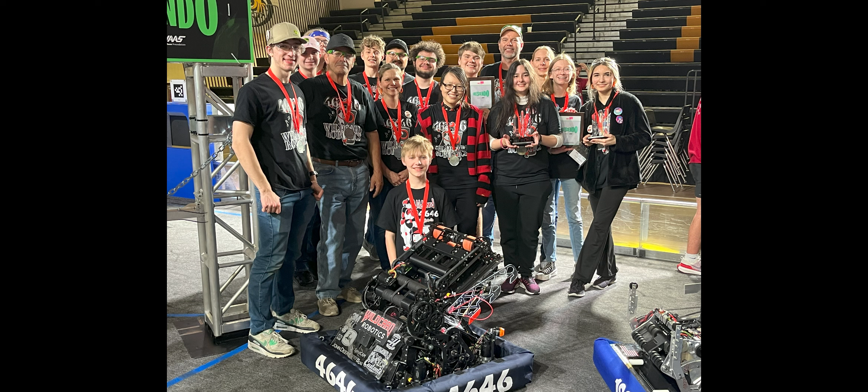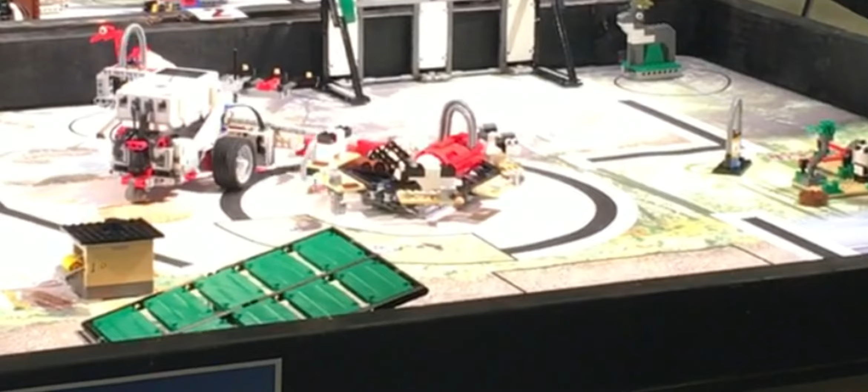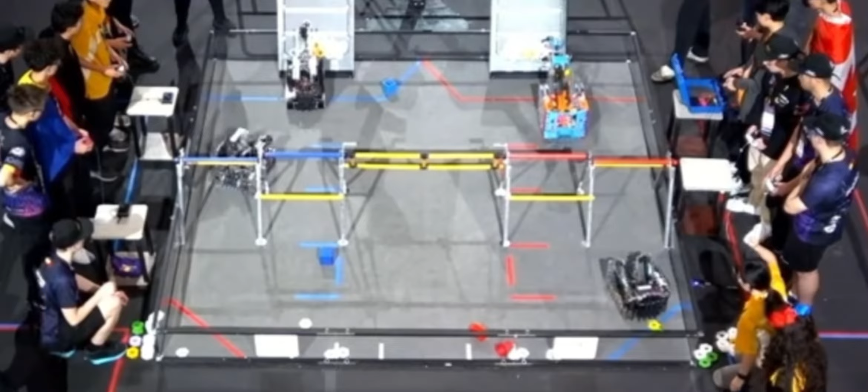We would like to introduce you to Wildcard Robotics, a high school robotics team that participates in the FIRST Robotics competition. FIRST Inspires has a full set of programs starting with FIRST LEGO Leagues for pre-K through elementary and middle school where students learn basic engineering skills. This includes an introduction to mechanical systems and structures, software programming and even sensors. The FIRST Tech Challenge program for middle school takes it to a new level to include mechanical design, electronics, and more sophisticated software and sensors.

For high school students, there is FIRST Robotics Competition or FRC. This is the level that Wildcard Robotics competes in, and we'd like to give you an overview of what FRC is all about and how this team is making an impact on our area students. Across the world there are nearly 4,000 FRC teams and 88,000 high school students that participate. 28 of those teams are in Iowa where it is steadily growing each year. Other states like Minnesota and Michigan where it has become an official varsity sport have over 700 teams and is in most schools. Our hope is to work toward that level of participation in Iowa.

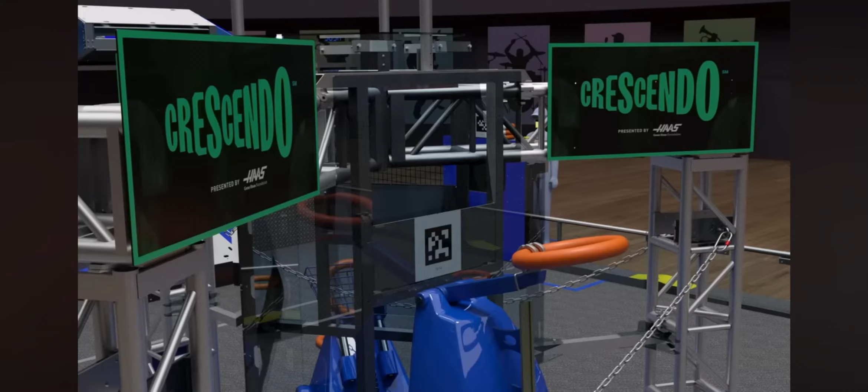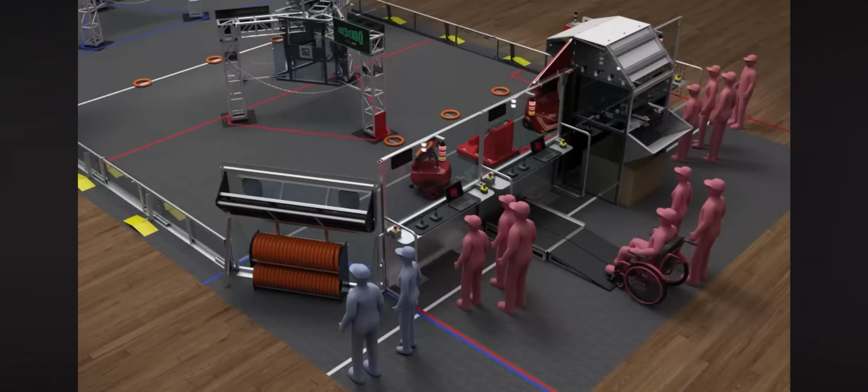The Wildcard Robotics team operates out of a large shop of one of their lead mentors and sponsors, near Polk City with the support of strong sponsorships from area companies. This year the team had 16 students from North Polk, Ankeny, and Madrid schools. Each year an all-new sport is revealed with a worldwide broadcast the first Saturday in January. The game is explained in detail, which is something very unique and exciting about robotics. From that moment, teams begin a fast-paced schedule toward the competition season that starts in just 7 weeks.

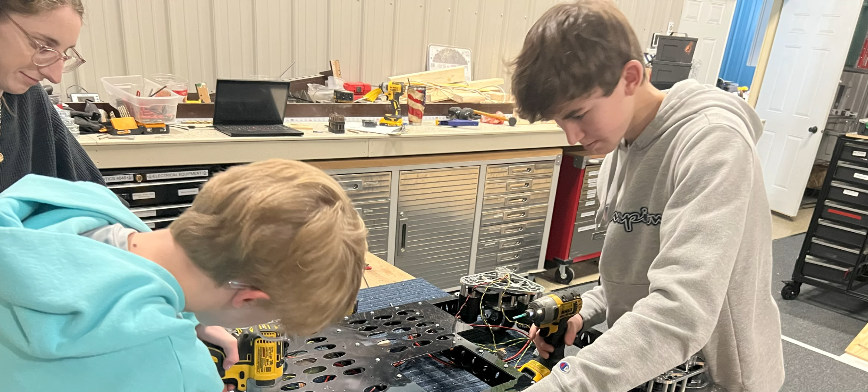The Wildcard mentors are professional engineers and business leaders that bring the engineering and fabrication skills necessary to help make this incredible challenge achievable. Their job is to inspire students, whatever level of engagement that requires, while enabling the students to do as much as they are capable. The team will divide into sub-teams each made up of students and mentors similar to how a company project team is made up of senior and junior engineers.

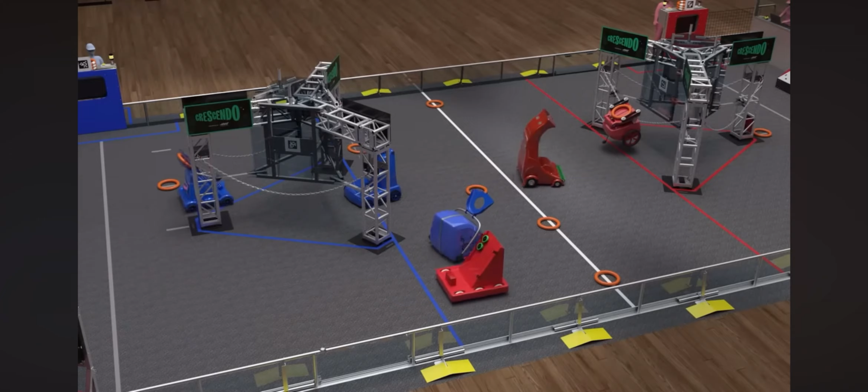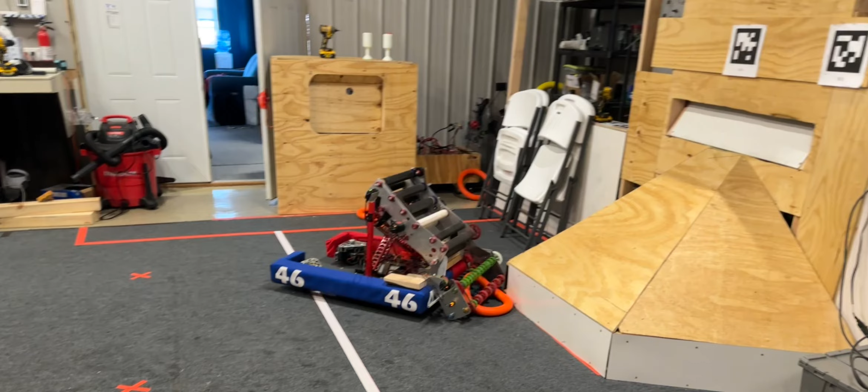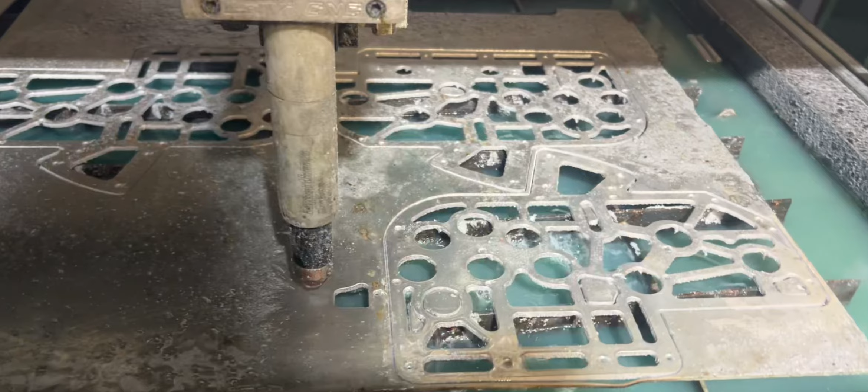The teams begin by understanding the detailed rules of the sport and develop game strategies. These strategies turn into system concepts which are quickly prototyped and tested before the complete design of the robot is created. While there are basic starting kits available for the teams to purchase and build off of, most teams start from scratch with an all-new custom design tailored to this year's challenge. Many teams, including Wildcard Robotics, design their robot in 3D CAD tools to have a fully detailed design that can be used by the team to fabricate the pieces and assemble it into the final machine. They try to make this as similar as possible to how an actual engineering team would research and develop a new product for market.

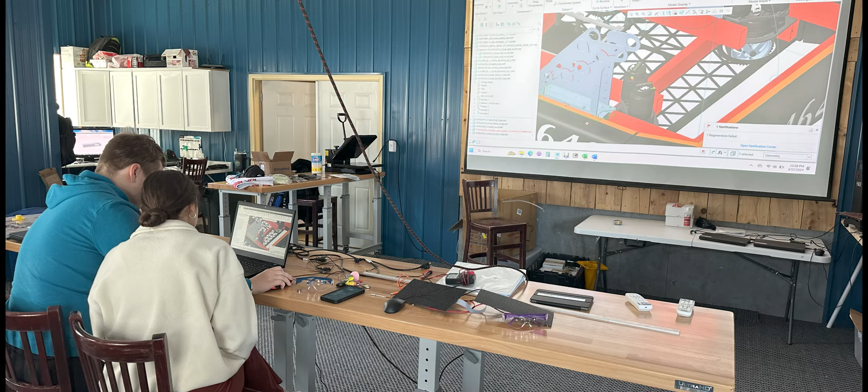Through robotics, students and mentors take on roles representing several professions such as mechanical and electrical engineering, software development and control systems, CNC machining, and of course using hand tools and most critically, being part of a team. There is also an art aspect that Wildcard Robotics embraces. Each year they generate new logos and graphics. They also powder coat their robot parts, along with LED lighting.

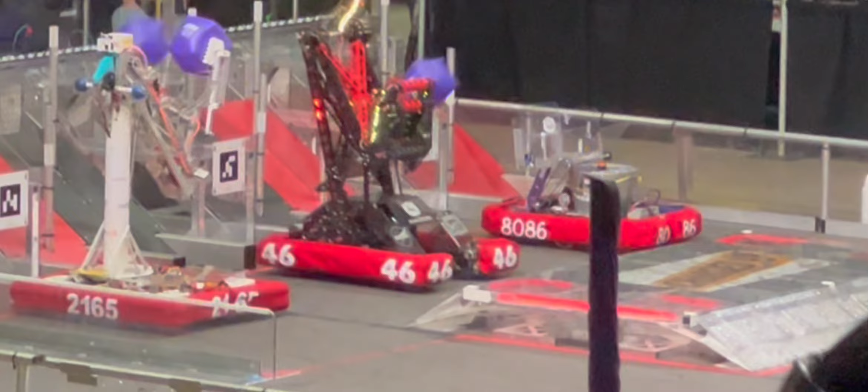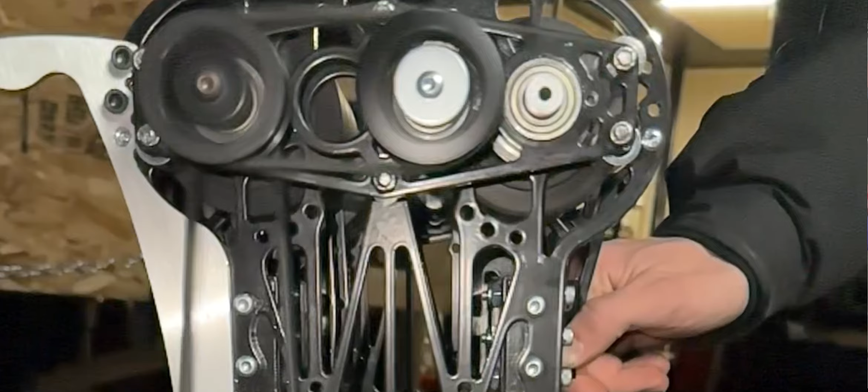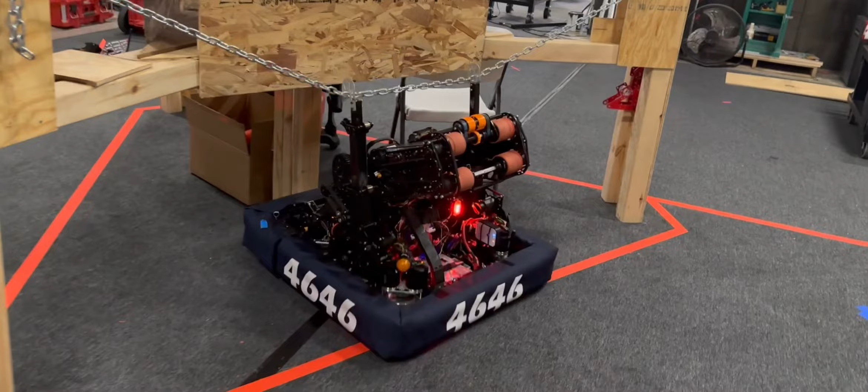Once the robot is assembled, the team tests the initial motion of the robot systems using code from the software team. The team installs sensors to add intelligence and control to the system. They then begin a process of functional development and tuning to get each system optimized. During this process the robot operators or drivers are getting practice. This turns into hours of practice to get the skills for high-speed maneuvers and operation during the competition matches.

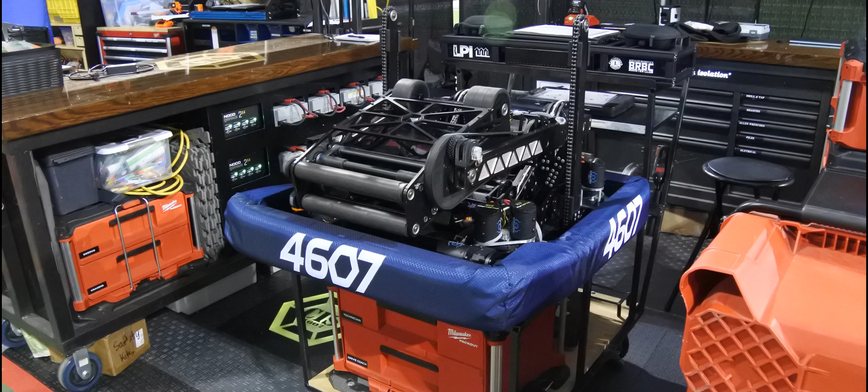The team participates in a series of regional tournaments over the 6-week competition season. Teams must pre-register for these events, with some teams choosing 1 or 2 events, while others have the budget for 3 or 4 events. At each event, between 35 and 65 teams come together from the surrounding area but also from distant states and countries. For instance, the Iowa Regional in Cedar Falls this year had teams from 6 states, Brazil, and China.

The event competition starts with each team being randomly paired with 2 other teams to compete in a 3-on-3 match that takes 2.5 minutes. The first 15 seconds of each match is an autonomous period where the teams show off their programming and sensing capabilities to try to get a jump start on the competition. After that, the student drivers take over and play the sport to accumulate the most points and also do special accomplishments to get rank points for the match. This happens again and again until each team has had 8 qualifying matches. Based on wins and losses and rank points earned during each match, the teams are ranked from top to bottom as the qualifying matches play out.

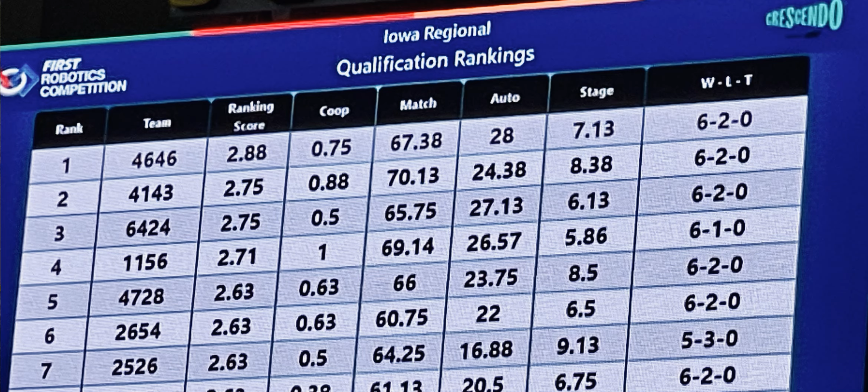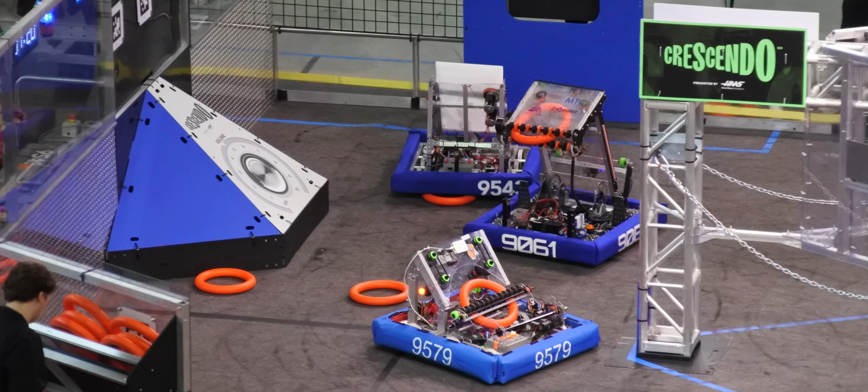The teams are working hard to rise up the qualifying order because after qualifying is complete, the top 8 teams become captains. Known as alliance selection, the top 8 teams take turns choosing teammates until there are 8 alliances of 3 robots. These alliances will stay together for the remainder of the event in a tournament that will determine the champion alliance. The teams on this alliance, along with some prestigious award winners, will qualify for the World Championships in Houston at the end of the season.

The Championships is truly a worldwide event, with more than 40 countries and every state having teams competing for a world title. 600 teams qualify for the championships and compete on 8 fields of 75 teams. The 8 alliances that win their field compete in the World Finals known as Einstein. In front of a crowd of over 50,000 people, this event is like none other in high school sports. At the end of this event in Houston, the teams on the winning alliance can truly call themselves world champions.

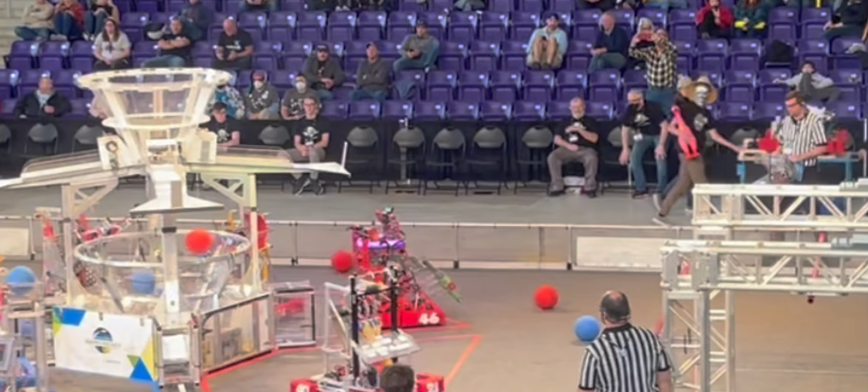This year Wildcard Robotics finished ranked number 1 in Iowa, were ranked in the top 10% in the world, and their student-led autonomous mode was ranked in the top 2% out of nearly 4,000 teams. We are looking to build on this success and look forward to attracting, inspiring, and developing the high school students in our area. We would like you to consider being a part of it.